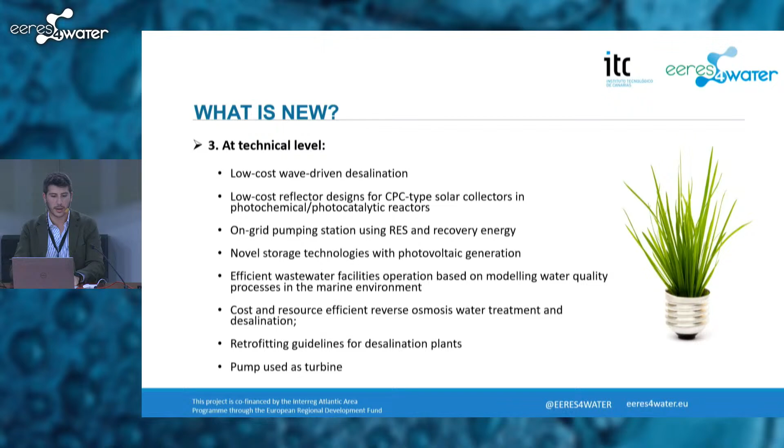Also new at technical level, we have developed several pilots and plans. Some of them are low-cost wave-driven desalination, low-cost reflector design for CPC type solar collectors, on-grid pumping station using RES and recovery energy, novel storage technologies with photovoltaic generation, efficient wastewater facilities operation based on modeling water quality processes in the marine environment, cost and resource efficient reverse osmosis water treatment and desalination, and retrofitting guidelines for desalination plants and pump use as turbine, were some of the technical aspects covered during this project.

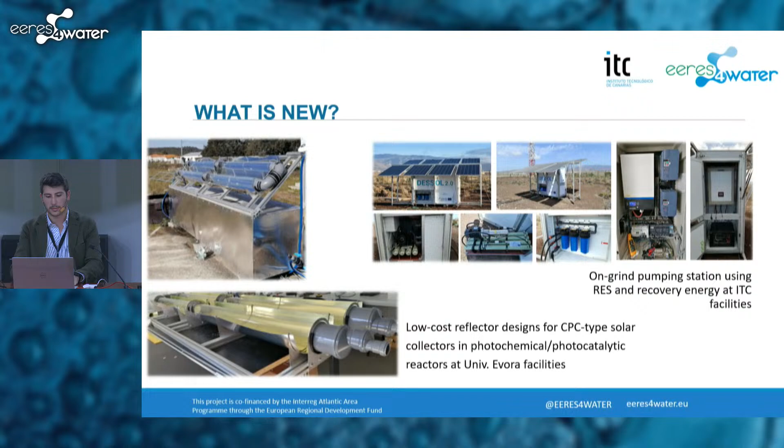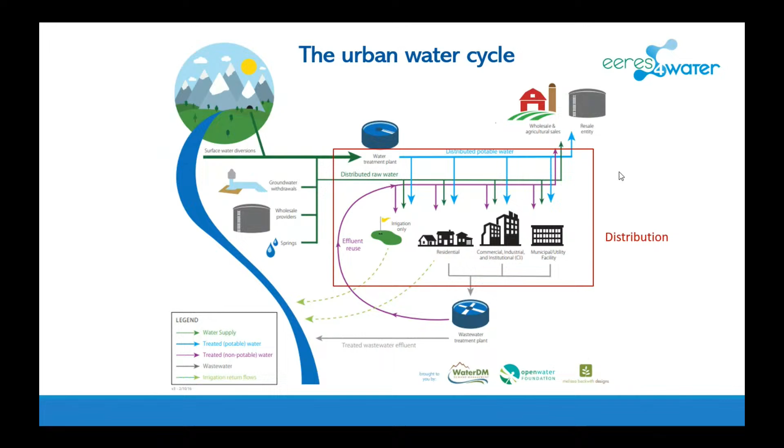So this is a very simple schematic representation of the urban water cycle, and I will cover some of the challenges and policy recommendations that have been found across the different parts of the urban water cycle, along the pumping and production, distribution to end users, and also collection for sanitation, and not least the wastewater treatment and reuse.

So two common features with different intensities in the 4 regions investigated is that, of course, demands are increasing all over, not just urban demands. Demands are increasing for many other uses as well. So this poses a challenge in terms of securing water quantity.

Different regions are placing different solutions, either by adopting desalination technologies or bringing water from long distance, or even groundwater mining. But there is also a growing problem of water quality deterioration caused by point source and diffuse pollution, and this is also increasing the cost of potabilization. Obviously, the pressures and risks emerging from these challenges lead to a deterioration of water bodies with the risk of non-compliance with EU directives. But of course, one can easily imagine that this is also increasing the energy footprint of water provision overall.

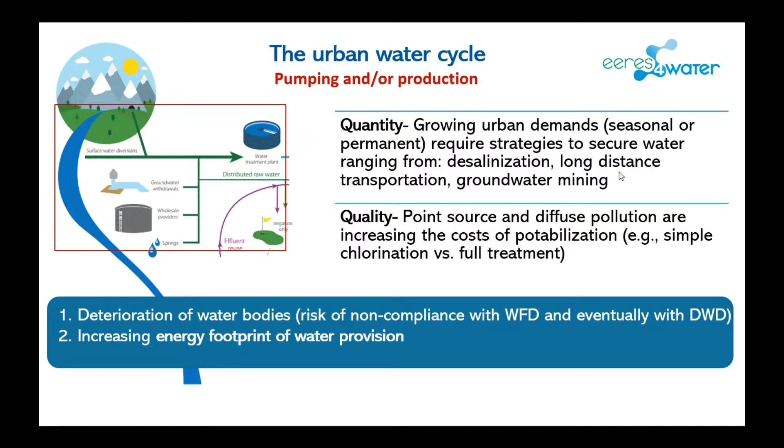When it comes to distribution, the two most recurrent issues we encounter: one is infrastructure aging, and this was a common feature across all the regions. The lifespan of pipes is simply prolonged well beyond their planned capacity, and this is somehow related to poor asset management. Another issue, recurrent in some regions but not necessarily everywhere, is limited capacity for controlling illegal water abstractions.

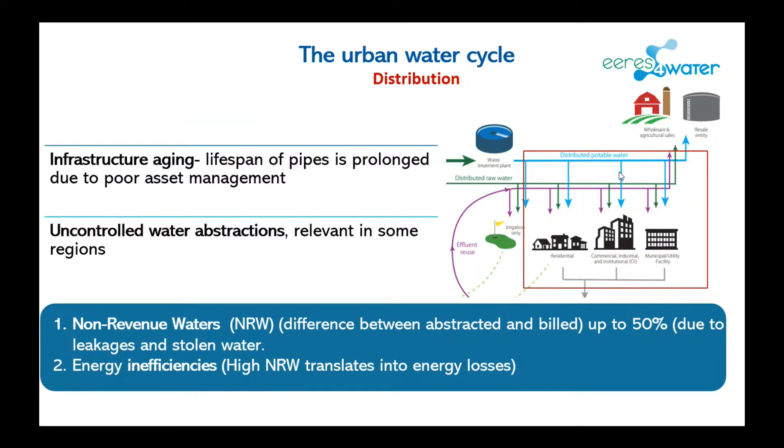This translates into a number of challenges, on one hand the high level of non-revenue water, understood as the difference between the water abstracted from the source and finally delivered to households. It can be up to 50%, in some cases even higher, although there is huge variation. This generates lots of inefficiencies, not just because a lot of water is lost, it's also water that isn't billed. And last but not least, very importantly as well, energy inefficiencies.

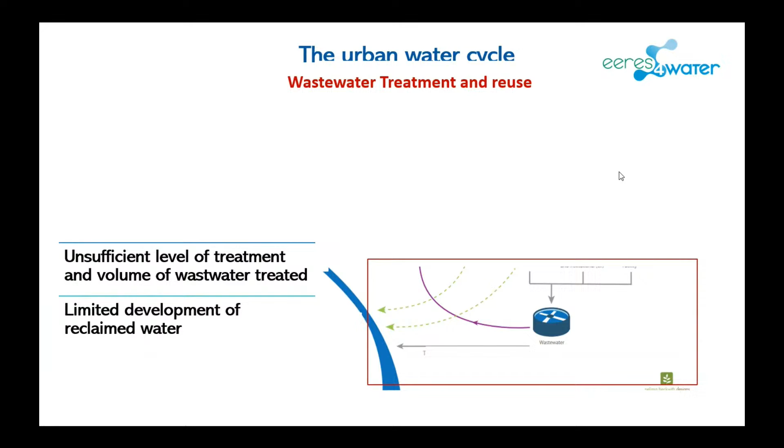When it comes to wastewater treatment, some of the most prominent challenges are first, the difficulties in the requirements and targets of the Urban Wastewater Directive. That means insufficient level of treatment in many areas, and also of the volume that is actually treated. And then also importantly, the limited development so far of reclaimed waters, due to different topics.

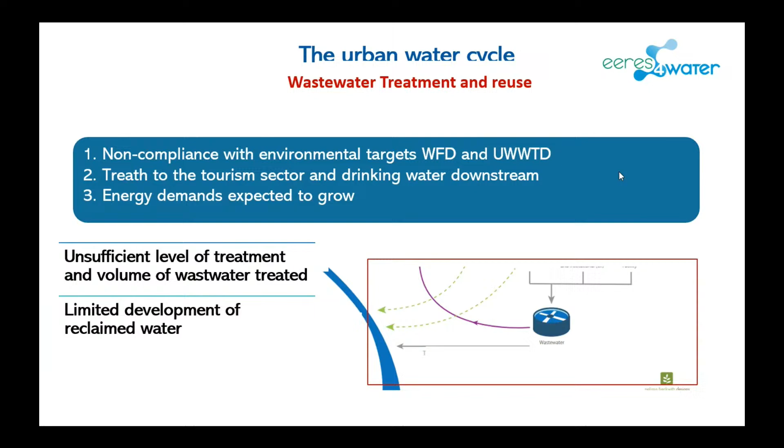This, of course, translates into risk of non-compliance with EU directives, but it also has many socioeconomic implications for the tourism sector due to the deterioration of water quality, and even for drinking water downstream. And importantly, there is a gap in terms of energy demands that will have to be met, so overall energy demands are also expected to grow on this front.

We did a much deeper analysis of what I'm presenting here today, but I want to highlight a number of the most outstanding policy recommendations that were provided. There were many technical recommendations, and this project has a strong focus there, so I won't go into the details. But what was most interesting when speaking with stakeholders is that a lot of the recommendations are actually at the level of the regulatory framework and institutional cooperation.

Fundamental aspects are also related to awareness raising. It seems this is still not clearly understood, and more efforts need to be allocated to raise awareness among citizens about the value of water, and the growing risk of mismanagement and climate change on top of that. Also, making more explicit the linkages between water and energy - when someone opens the tap, they're not necessarily aware of the amount of energy resources behind it.

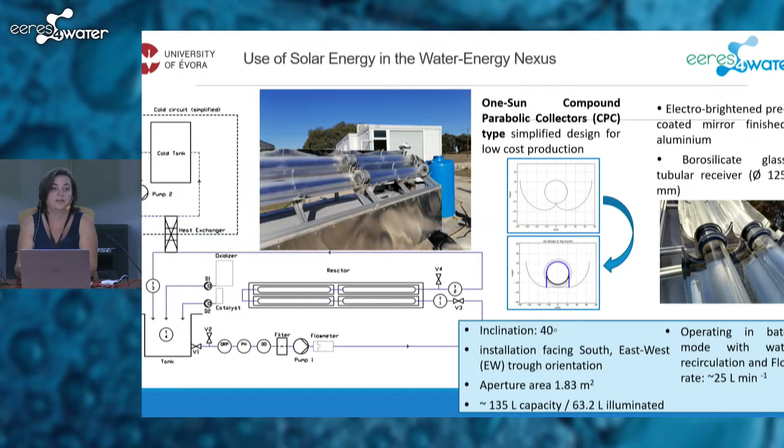This reactor has a compound parabolic collector type that is able to use both direct and diffuse radiation in these photodegradation processes. The design of this collector has been simplified to decrease production cost, which is one of the main innovations of this reactor. Also, the tubular receivers where the fluid circulates have a higher diameter, so we have a higher path length, allowing also the treatment of batches with higher volumes.

This reactor is installed at University of Évora facilities and is able to treat 135 liters each time of effluent, with a total volume of 135 liters, of which 63 are illuminated. Here are some images of the reactor under operation. Furthermore, this system will have a photovoltaic system to provide energy for the auxiliary systems, making it 100% renewable.

Our first experimental tests were carried out with 4 pharmaceutical compounds detected in surface waters in the Alentejo region, and they proved capable of removing up to 79% of naproxen and 88% of diclofenac, without the use of any catalysts.

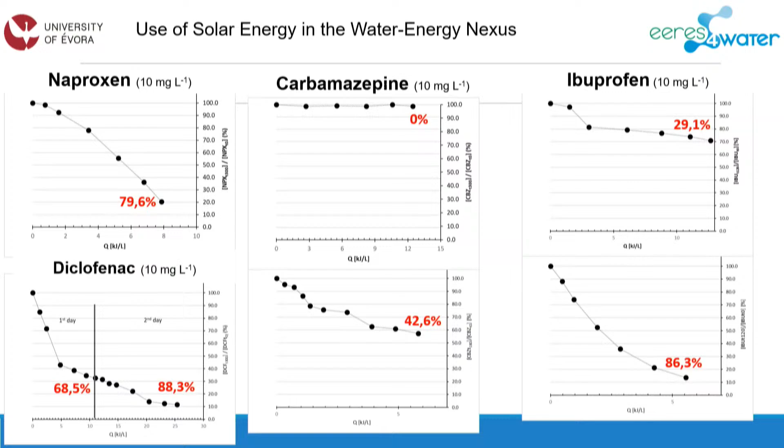For other more recalcitrant compounds such as carbamazepine and ibuprofen, which cannot be degraded only with direct use of radiation, further heterogeneous photocatalysis tests were carried out using titanium dioxide as a catalyst. In this case, carbamazepine was reduced up to 42% and ibuprofen up to 86%. So this can really be a new technology that can be coupled to conventional wastewater treatment processes.

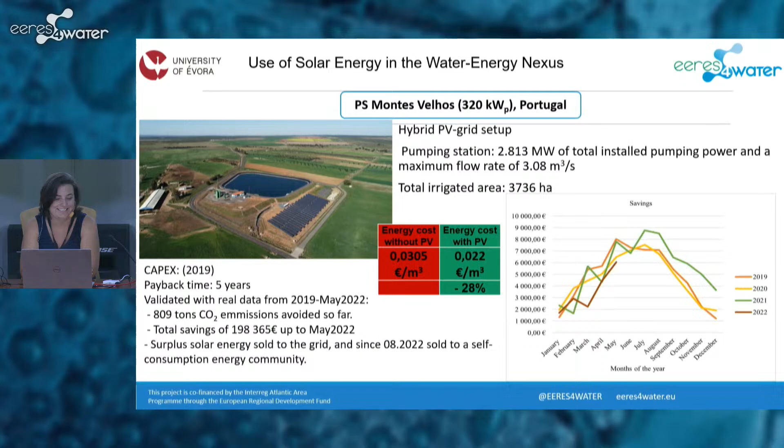Hi, good morning, thank you all for coming. I'm going to present another type of solar energy application to the water energy nexus: in this case, photovoltaic pumping or irrigation.

What are the main issues we should tackle regarding this technology? There are three main topics: first, how to properly design a system like this for high power pumping or high power irrigation; second, after designing it, how to finance it, how should we pay for these systems; and third, how should we operate, control, and properly maintain these systems to match the performance indicators for these kinds of business models. These were the three main issues we tackled.

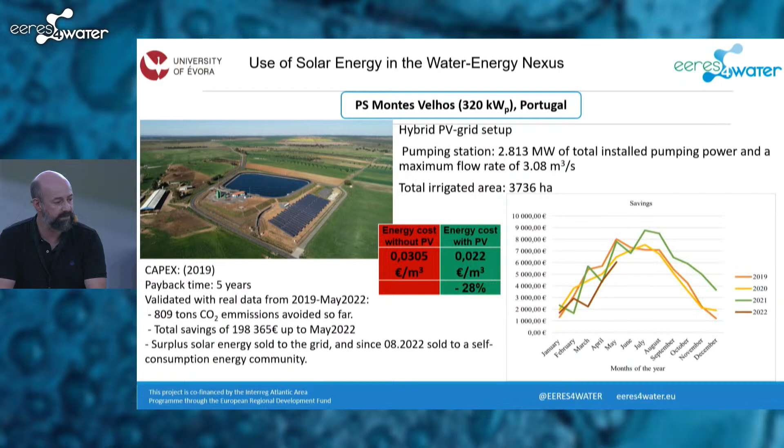Today I bring you two slides with two real case study examples that we have approached and developed, with real data, so what you are seeing here is real data of these systems. They are still operating and are within partners of our unit. For instance, this is a hybrid photovoltaic and public grid setup, so hybridization is possible, and different configurations of power sources can be made. This is a huge pumping station with almost 3 megawatts of pumping power.

So it's providing pressurized water to farmers of 3,700 hectares of irrigated area. The capex of this installation was more or less around 300,000 euros, and the payback was defined for 5 years.

With real data up to May this year, we have calculated almost 800 tons of CO2 emissions avoided, so really important figures. In savings, we already surpassed more than half of the capex investment. The energy costs for pumping at this station have become lower, almost 30%, with this kind of installation.

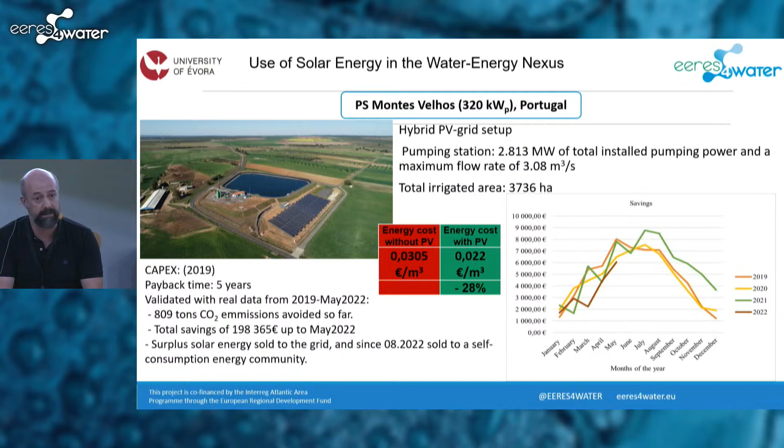So the owners and end users can be really happy with this, and probably they will expand this solution in the near future.

So how should we design it? We have tackled the different issues here. We are really advising users and providing good practices for design. They should be using one-axis sun trackers like this one, that track the sun on a horizontal axis from east to west, providing a flat power generation profile along the day, with high power available for pumping from early morning until very late in the day. These are the configurations that should be used in this kind of pumping solution.

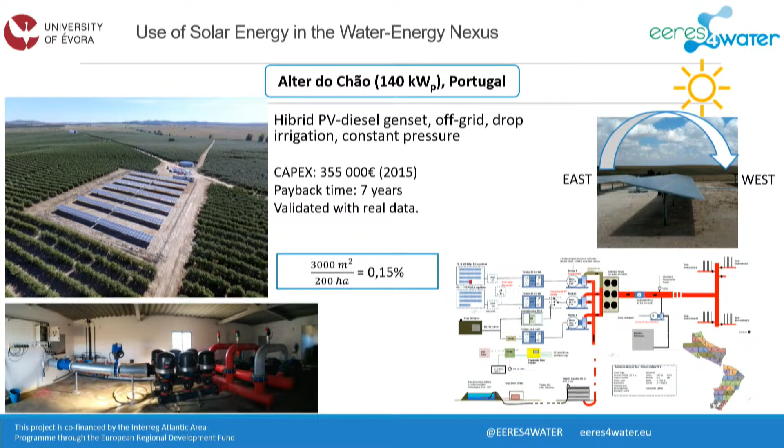And this system design really matches the irrigation needs and seasonality. So when you have the higher irrigation needs, you also have the higher solar resource availability.

So this is a different configuration, a hybrid photovoltaic diesel generator setup, an off-grid application. This is an olive orchard farm where we are irrigating almost 200 hectares of land. This pumping station is very far from the electric main power lines, so it's not feasible to do a grid connection here. The previous energy source was a diesel generator.

As you imagine, it's quite expensive right now to do irrigation with diesel generators. The irrigation sectors were already designed so they have to irrigate during the night due to the design of the hydraulic sectors. So we are really having the best of a hybrid photovoltaic diesel genset system.

The payback time with the capex from 2015 is more or less 7 years, probably much lower now with the current downward trend of PV prices.

And just to destroy the myth that we occupy valuable land, you can see we occupied 3,000 square meters, which is much less than 1% of the land of these olive orchards. So this is really a myth. We can irrigate a huge land while occupying a very small area.

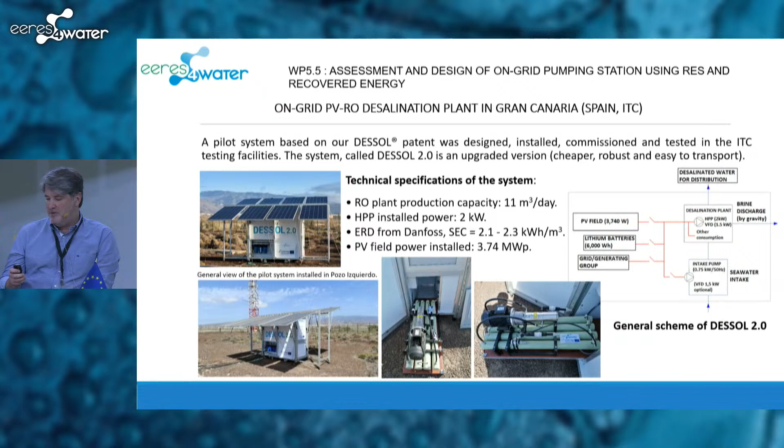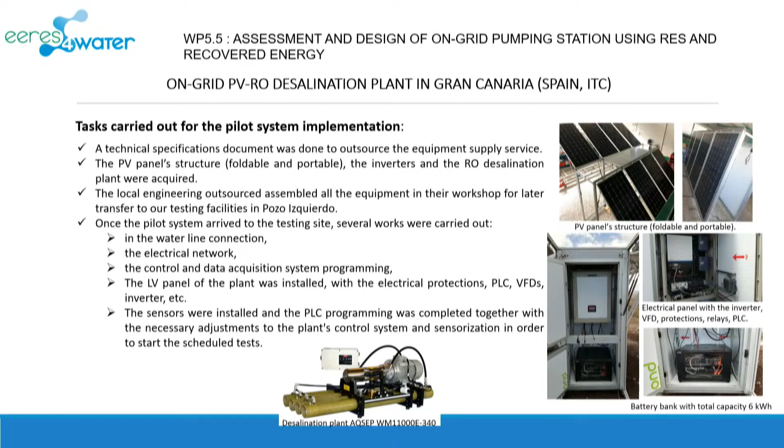The tasks carried out for the implementation of this system: first we made a technical specification document in order to outsource the equipment supply service to local engineering. Then the PV panel structure, as you see in the image, foldable and portable, the inverters, and the reverse osmosis desalination plant were acquired. The local engineering outsource assembled all the equipment in the workshop for later transfer here to Pozo Izquierdo.

Once we had the pilot here in our testing facilities, we started carrying out several actions. The first was the water line connection, the electrical network, and the control and data acquisition system programming. The low voltage panel of the plant was also installed with electrical protections, PLC, VFDs, inverter, and so on. An important thing I'd like to highlight is the sensors — we have totally sensorized the desalination plant.

Some scheduled tests were carried out, mainly focused on three ways of driving the plant. The first one was solar PV plus electrical grid. The second group of tests was solar PV plus batteries. And the third one was solar PV plus batteries plus grid.

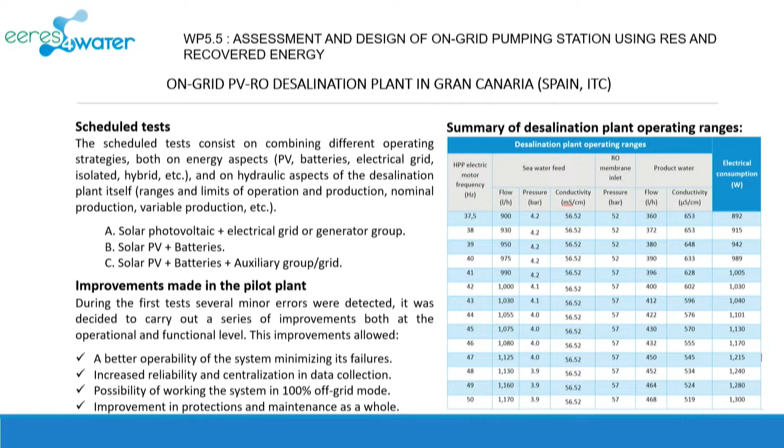During the first test, several minor errors were detected, and we decided to carry out some improvements in the pilot plant, both at the operational and functional level. These improvements allowed us better operability of the system, minimizing its failures, increasing reliability and centralization of data collection, the possibility of working the system 100% off-grid, and improvement in protection and maintenance as a whole.

Here in the table you can see a summary of the desalination plant operating ranges.

Among other improvements, the inverter charger was replaced by a Victron pack system that allowed us better control over the operation of the reverse osmosis plant, and the centralization of data records from both the PV system and the desalination plant. This is important because this improvement wasn't initially contemplated in the project.

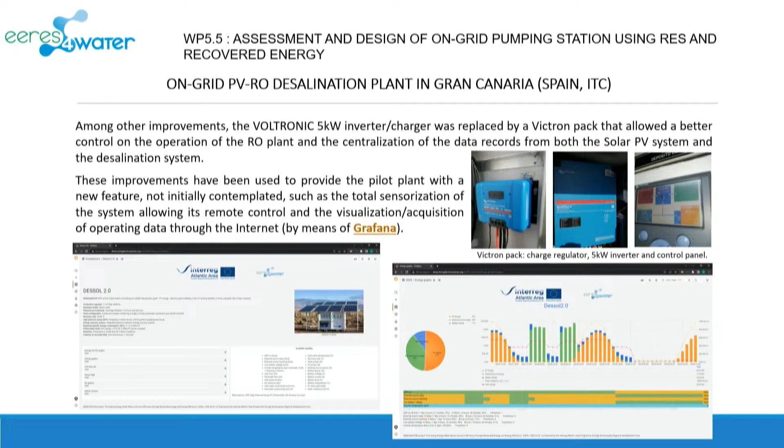Now my colleague Carmelo, who has worked very hard on this system, will show you a presentation of the Grafana system.

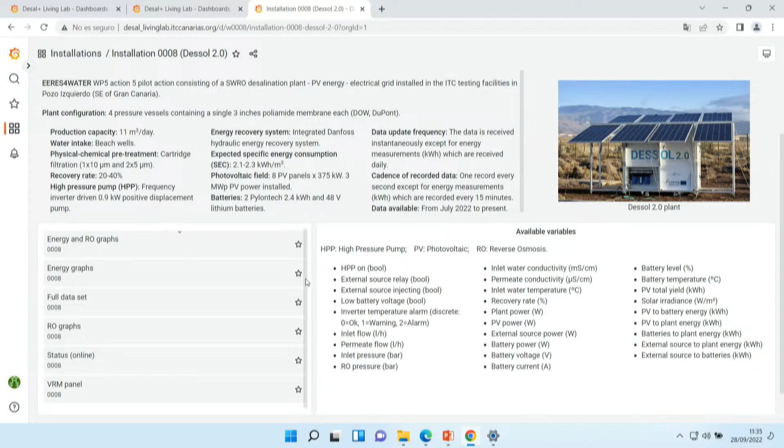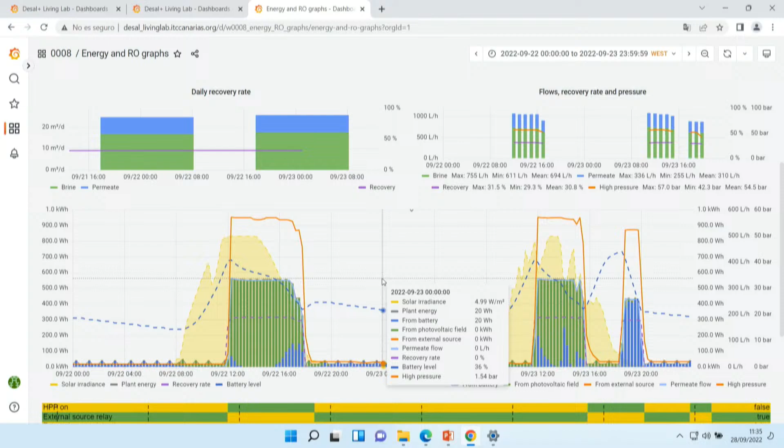Good morning everyone. Here you can see the platform where we implemented the visualization of the plant's parameters. Here we have an example combining the solar field, photovoltaic energy production, and the plant operation. In the top right corner, we can change the period.

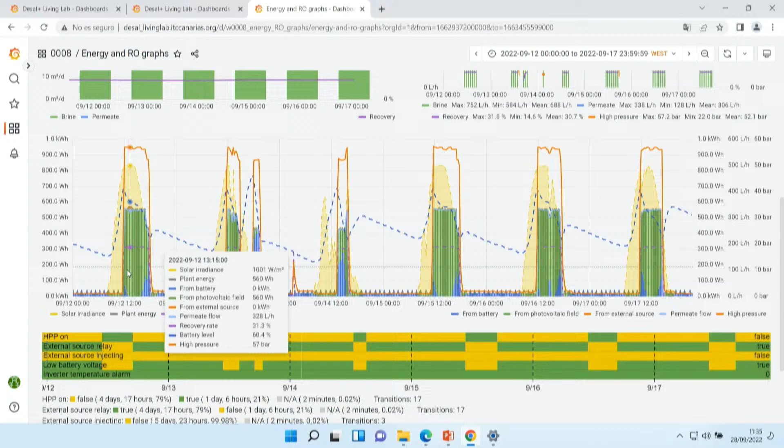We can see a wider range, and it will change in every single panel in the dashboard. We can check how the water production or the solar energy production was, and where it was destined - to the battery from an external source or directly to the plant.

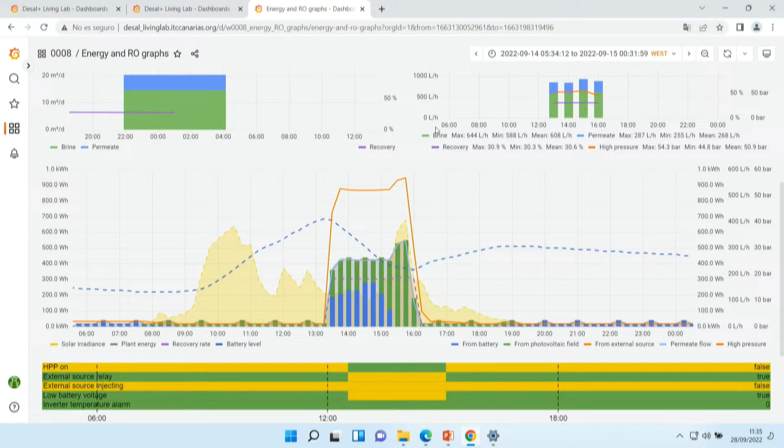So here we can also see the plant live, its current status, but unfortunately it's not working right now, so we can't show you. That's all from the platform.

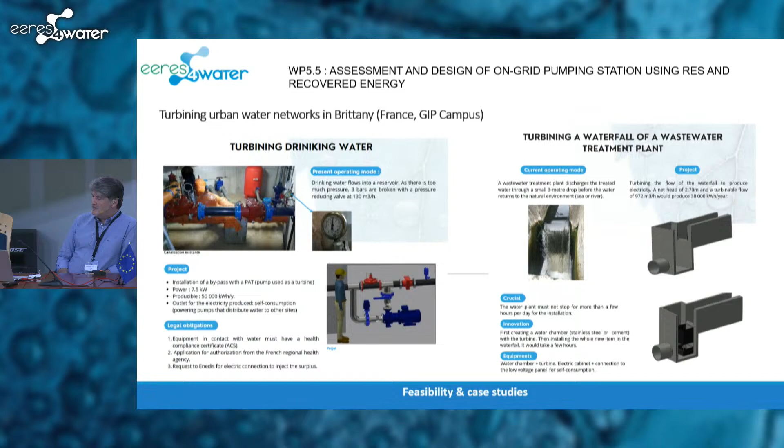You're on mute, Eric. Okay, do you hear me? Yeah. Okay, thanks. I've got some echo, it's okay. Can you please show me the PPT? Thanks, so the screen is a bit fuzzy. Maybe I'd better read my own screen, but you can stay on the PPT.

GIP worked on the turbining of water networks in Brittany. As you can see, we did a feasibility study about turbining drinking water. We get water coming from the pipe into a reservoir. There is too much pressure, so a pressure reducing valve is breaking this pressure, 3 bars at a flow rate of 130 cubic meters per hour. So the energy is just dissipated into noise and heat.

The aim is to install a bypass with a micro turbine. In fact, it's not a real micro turbine, it's a pump used as a turbine in reverse mode. With this kind of installation, we can recover around 50,000 kilowatt hours a year.

The good thing with this pump is that when you install equipment in contact with drinking water, you always need a health compliance certificate, and the pump already has it, unlike the turbine.

The second case study is turbining a waterfall at a wastewater treatment plant. The project deals with a head of less than 3 meters, and a flow rate a little less than 1,000 cubic meters per hour. Turbining this fall, we had a necessity to avoid stopping the wastewater treatment plant for many hours. So the challenge was to create a water chamber with the turbine already implemented, and then install all these items in the fall of the wastewater treatment plant - and that's quite possible.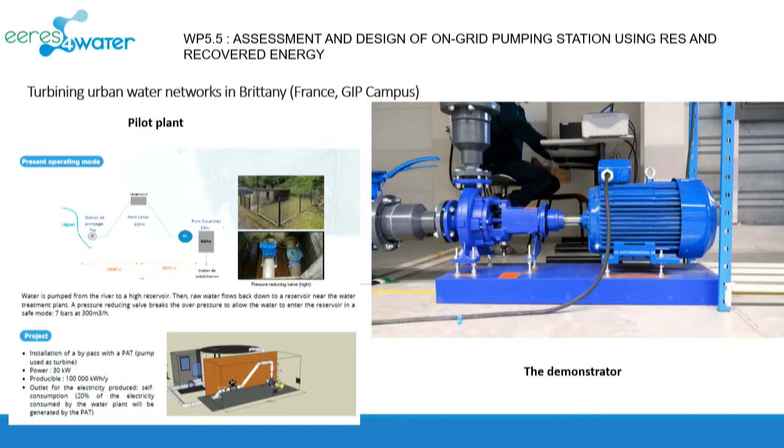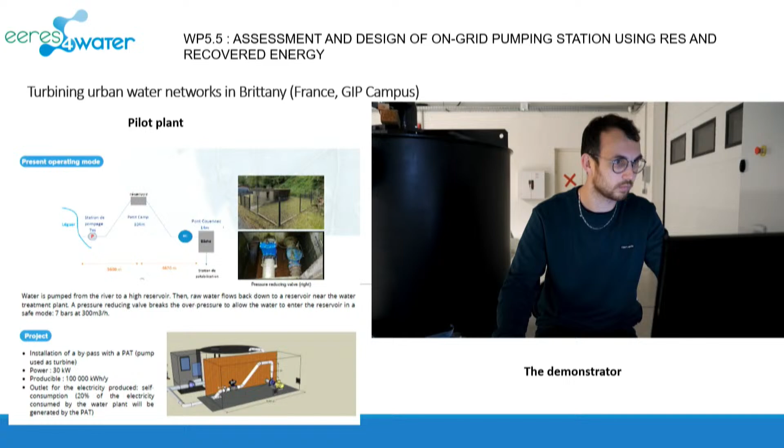Maël, the doctoral student working on the project as well. Thanks. Next slide, please.

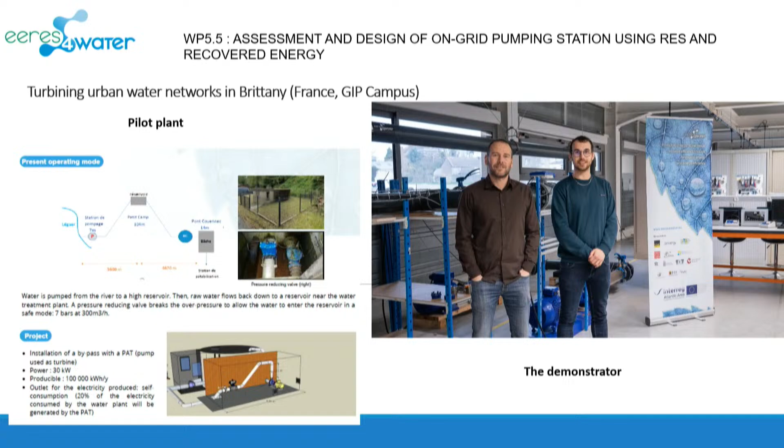Okay, let's look at some opportunities for microturbining drinking water. Actually, there is some energy available, but it's unexploited yet. Pumps used as turbines are between 2 to 5 times cheaper than a turbine. We already got the ACS, the attestation of sanitary conformity, which is required when you're in urban water.

It's easy maintenance - it's a pump turbine, it's like a pump, same maintenance. Most of the time, no civil engineering is required, just a bypass with a pump. The whole system remains in place and still works. The priority is always the water service.

All those results will be in the document that we are making with ITC in order to show you all our work. And we aim to disseminate all this technology, and we hope that each stakeholder or water company can implement this kind of system as well. Thank you very much for your attention.

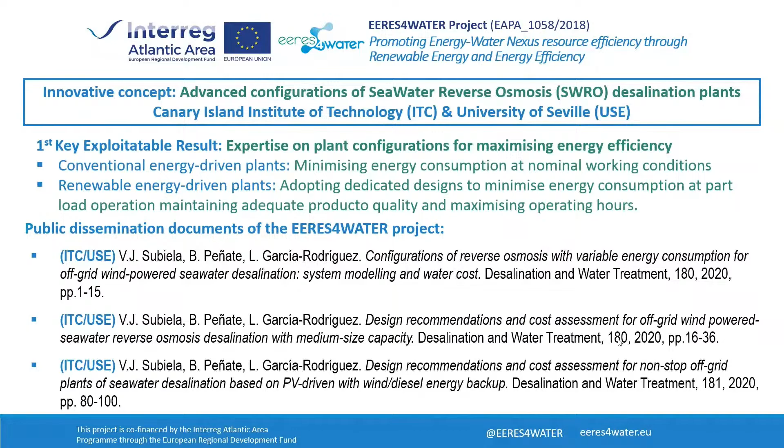Second key result corresponds to design recommendations of desalination plants coupled to conventional technologies of concentrated solar power plants. We have been working with Plataforma Solar de Almería CIEMAT and the University of La Laguna.

All of us, and also University of Évora, are working on integrating desalination into the next generation of CSP plants, specifically plants based on either conventional gas turbines, supercritical CO2 cycles, and supercritical water cycles.

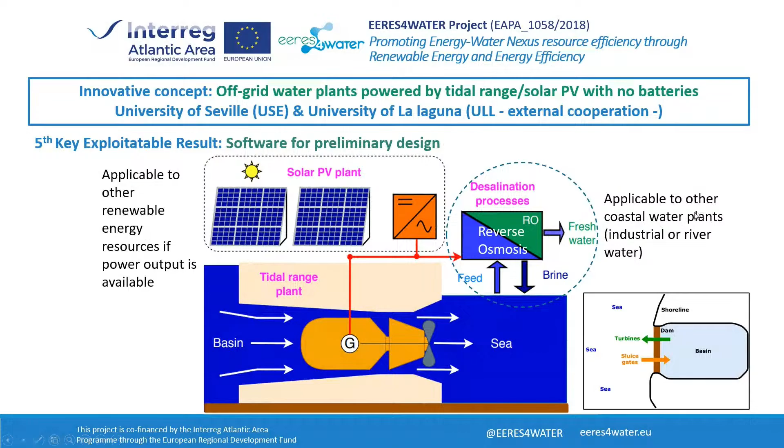On the left, the hybrid power plant drives the reverse osmosis plant in a seawater desalination application. We developed dedicated software for preliminary design, and have 3 related publications so far. Needed inputs are the solar and tidal range resource of the plant location. You can see the case of Cardiff concerning public data on tidal resources.

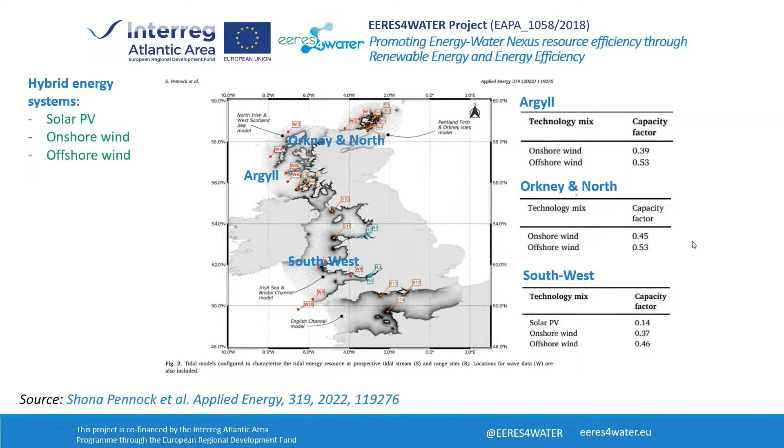As future work, other renewable energies should be studied. We found a comparative assessment by means of the capacity factor of the power plant corresponding to solar and wind energies. So offshore wind system seems to be the most suitable selection for hybrid tidal plants. This will be our following target, out of the scope of this project.

Design targets will be, first, optimization of the consumption curve due to the use of advanced water plants based on gradual capacity designs, which is our first key exploitable result. Second, optimization of the production curve. We are studying 3 options which are described in the following slides.

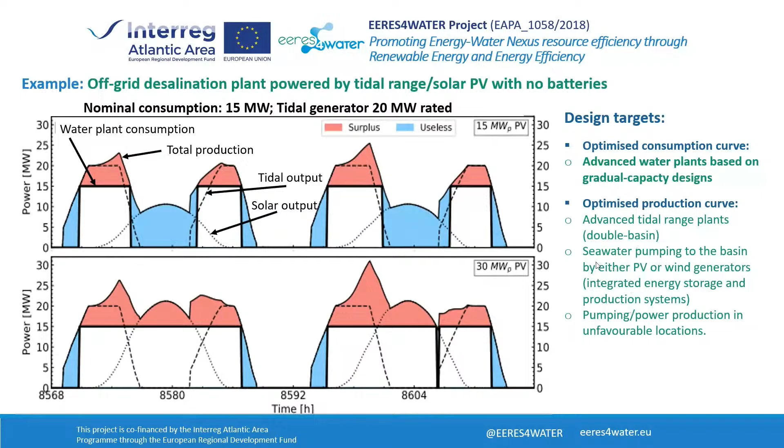We can optimize the tidal range power production by means of adopting double basin tidal plants. Turbines work between basin 1 and 2 instead of between the basin and the sea.

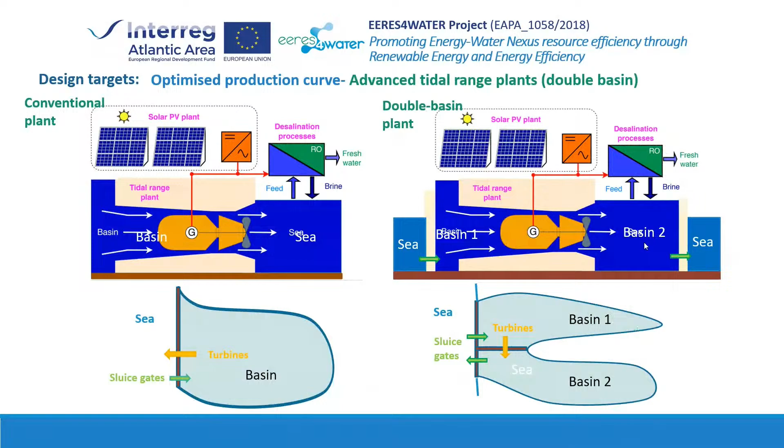A second option corresponds to integrating energy storage in the hybrid plant by means of water pumping from the sea to the upper basin. You can see the concept in those figures.

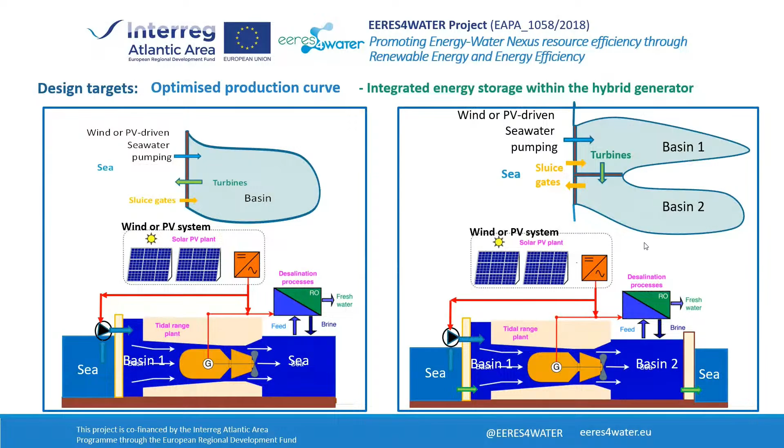Finally, given that many regions in the Atlantic area exhibit limited tidal range resources, we are studying the concept of combined pumping and power production in order to integrate large capacity energy storage and also manageable power production.

And that's all. Thank you so much for your attention.

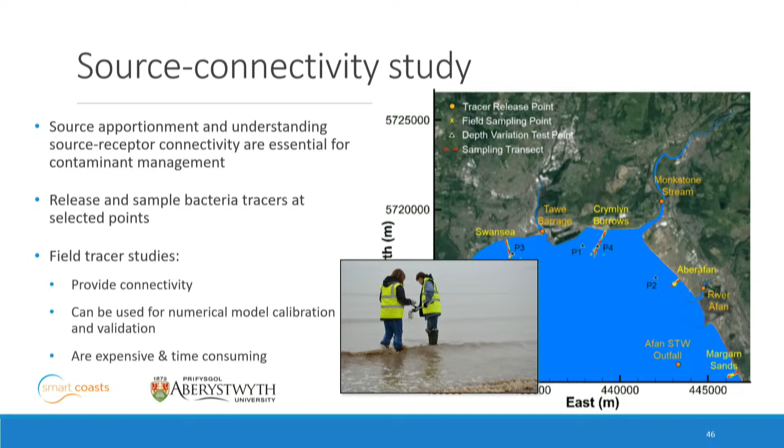The other approach is numerical modeling. Numerical models are fast and fairly cheap compared to field studies, but you need data to validate these numerical models. So in this project, we took a case study located in Swansea Bay, in South Wales, Southwest England, Southwest United Kingdom.

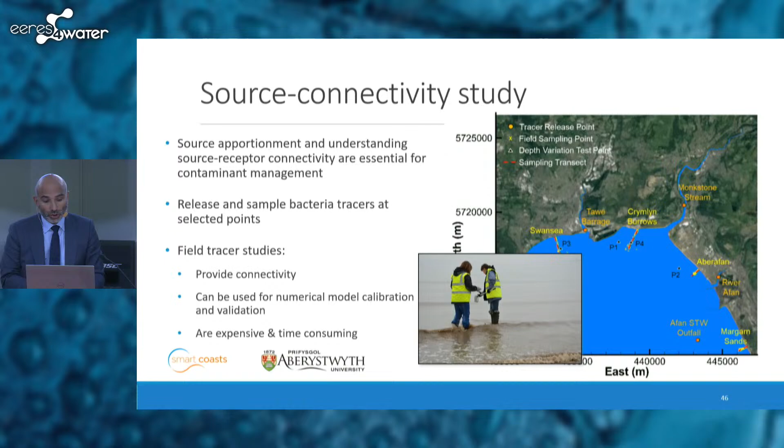We took this case study and tried to enhance our model to make sure it included all the physical activities. We chose this site because there are different sources of bacteria, including wastewater treatment works, rivers, and streams discharging to this area. Also, a large amount of data was collected in a previous project called Smart Coasts, through our colleagues at Aberystwyth University.

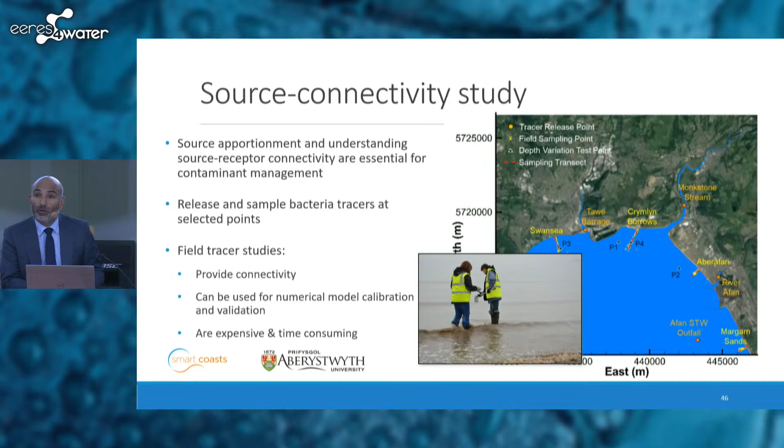We used this site, and the estuary is very well mixed—it has the second highest tidal range as part of the Bristol Channel Severn Estuary. You generally use a two-dimensional model for a case like this, so we set up our Telemac two-dimensional model, which is very widely used, and started predicting.

We looked at the processes and found out we actually needed a three-dimensional model. But a three-dimensional model doesn't work just because it's three-dimensional. One key element was buoyancy and the effect of salinity, because fresh water coming from the rivers was lighter, so it was floating on top of saline water, and that fresh water was carrying contaminants—it was key to our modeling.

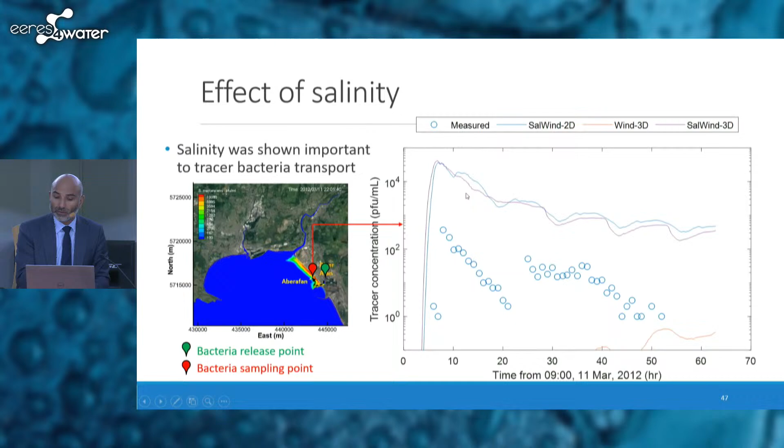When we started modeling in 3D with the impact of salinity and wind, we got much closer results, shown at the top, but they weren't ideal yet. We had seen before that you need to use different decay rates because bacteria die at different rates, so we started using a two-stage decay rate and got a better result.

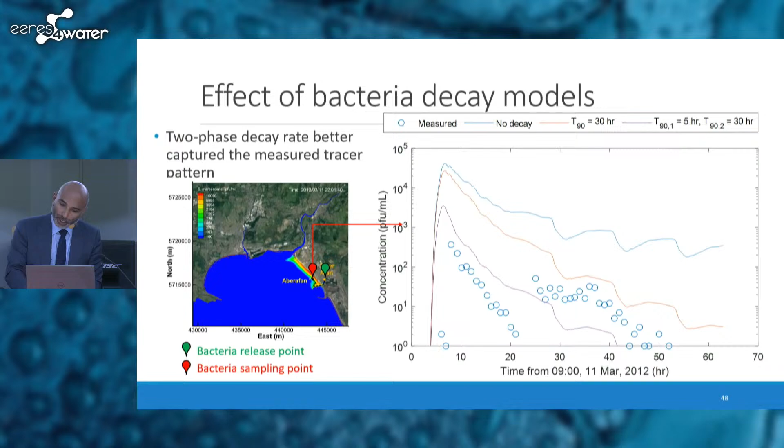I have very little time, so I won't go into details of those, but if you're interested, come talk to me later. I also mentioned diffuse sources.

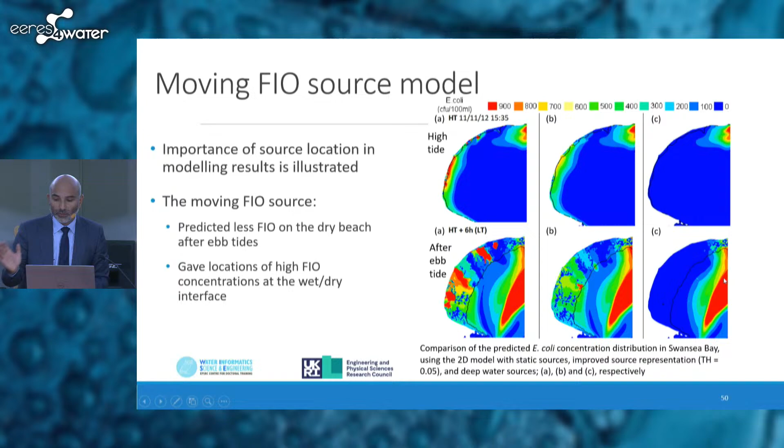We started doing that. The first approach used points close to the land to represent the streams, and the second used deep points to represent the streams. None of these represented the physics properly. So instead, we tracked the wet/dry front and added discharges at the points where water actually meets the streams, and we got results much closer to reality.

Now I pass to Arthur to talk about our real-time modeling, which was based on AI.

Early warning systems are important since they issue warnings about future poor water quality. There are several examples in Cardiff Bay, the EU Swim project, and also in Hong Kong. They have warning systems you can check on your iPhone showing how poor or good the future water quality is. This system can allow wastewater treatment operations to meet water quality standards with minimal possible energy, because you know the future expected water quality. Also, it can warn the public of poor water quality in the future so they don't go to the beach.

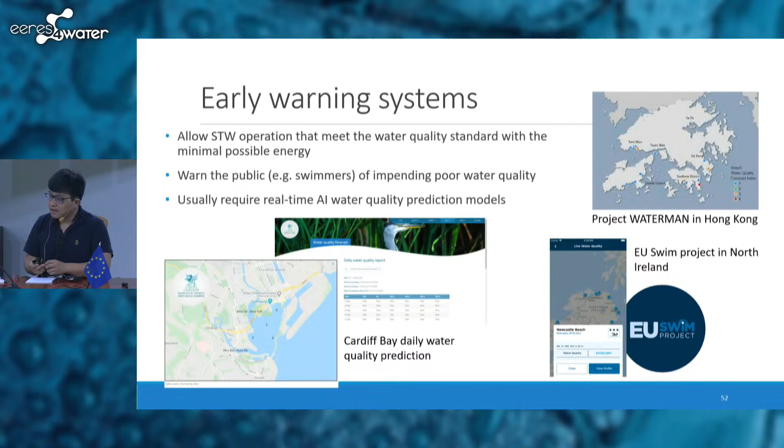However, this real-time warning system needs very quick prediction methods. Hydrodynamic models are very good at understanding the system, but may not be quick enough to produce real-time predictions. So we have to rely on AI or data-driven kinds of models. One integral part of this AI model is knowing the key explanatory variables to put into your model before you train it.

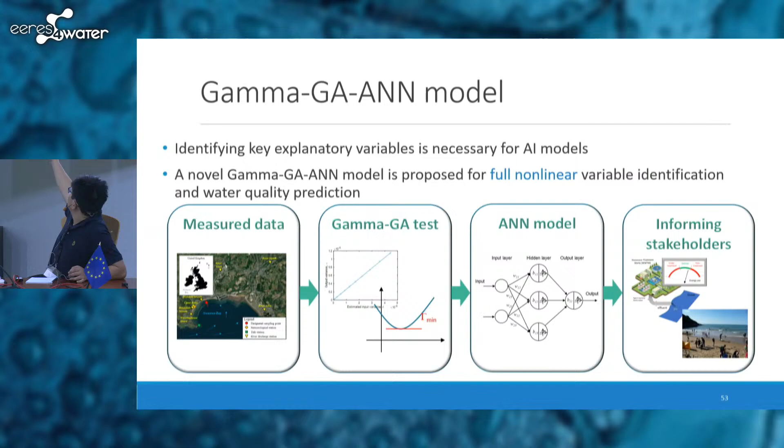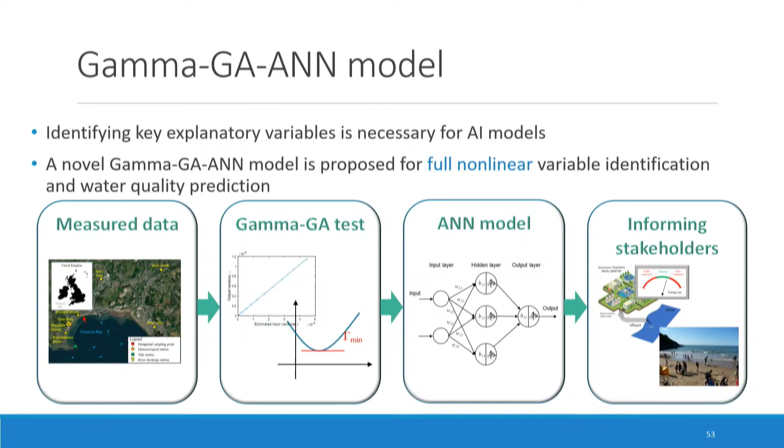Usually this is done, at least in the water quality community, with a linear regression kind of model. So here I propose a gamma GA-ANN model, which can do fully nonlinear identification of variables and water quality prediction. Here are the steps: first, you measure the data; second, you put the data into a gamma GA test, which I will explain; the third is the ANN model, which is quite common; and then we pass the information to stakeholders, such as wastewater management and beach management authorities.

Here is the gamma test. This is a mathematical method where you put in the input data, and it gives an estimate of the noise for an arbitrary continuous nonlinear model. Interestingly, this gamma test does not tell you what the model is, but it can estimate the noise. Let's say we have a lot of variables, we arbitrarily pick a set, plug it into this model, and play around with it. The one that gives you the smallest noise is the variable that you should choose.

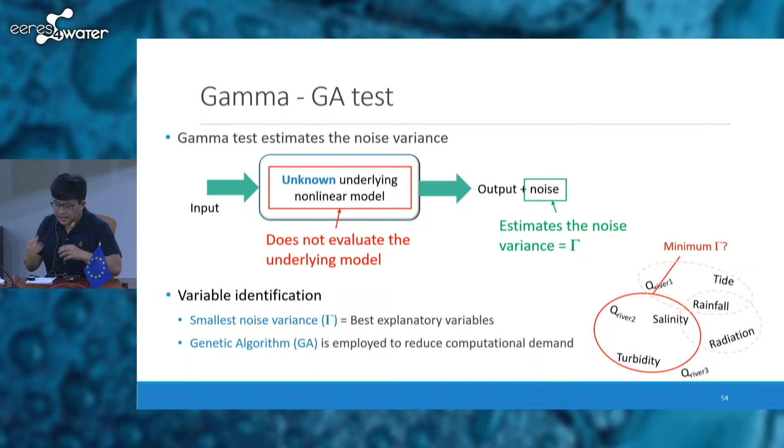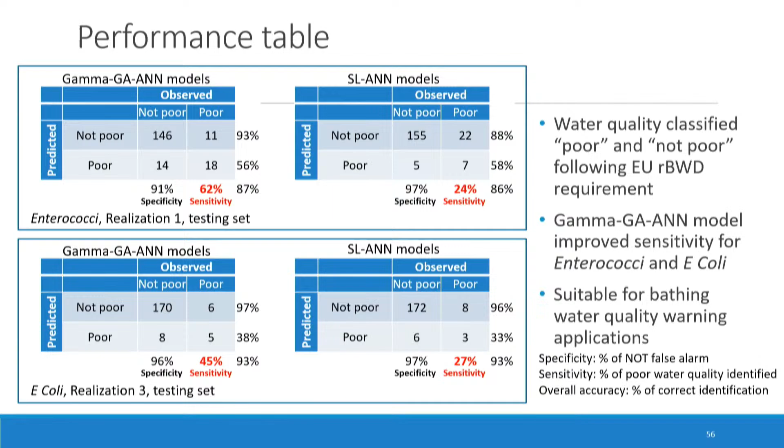Here I compare the gamma GA identified variables, on your left, and the linear identified variables, on your right, in terms of predictive capacity and sensitivity. You can see that the nonlinear model better captures high pollutant events, showing higher sensitivity at the left-hand side compared to the right-hand side. So this new model is better for a warning system because it gives more sensitivity to risky or poor water quality events.

So here comes the conclusion. We have introduced AI and hydroenvironmental models that are important for strategic wastewater treatment and also for warning swimmers. We have developed two types of models which give more information about how to optimize wastewater treatment, but such potential has to be further looked into. Okay, thanks. Thank you.

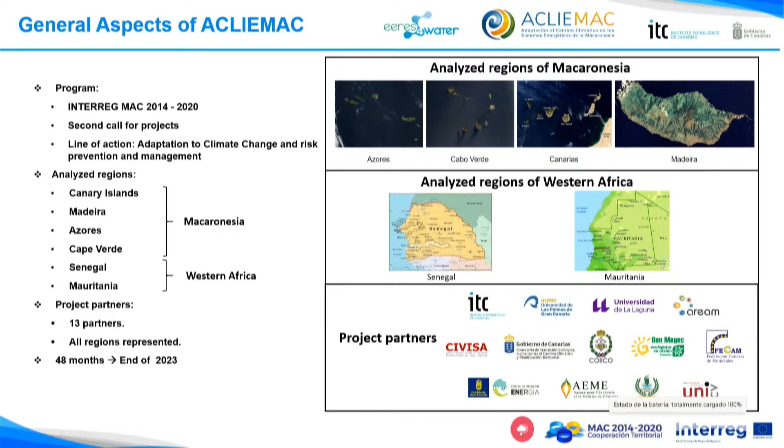So, in the project there are 13 partners. ITC is coordinating the project, and we have, as you could see, all the regions participating in this call: Azores, Madeira, Canary Islands, Cape Verde, and also Senegal and Mauritania, West Africa regions, in which we are implementing solutions. We also do paperwork regarding the planning. We started in 2020, and we finish this project next year in 2023, so we are in the last section of the work.

As an example of the results we have obtained, we are going to present the ones we have for the Canary Islands. Anyway, we have results also for Madeira, Azores and Cape Verde until now, so if you have any interest, we can speak about that.

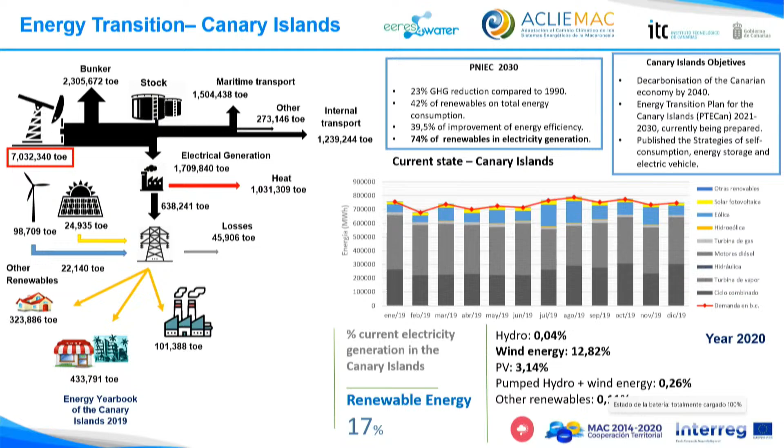For the Canary Islands, first of all, regarding the analysis of the current situation, we have a strong dependency on the use of fuels. We require around 7 million tons of oil equivalent per year to keep our energy system running, and that means around 1.7 is required for the electrical system and around 2.7 for mobility. So we need to decarbonize, and all the governments know that. The objective for the Canary Islands is to reach total decarbonization before 2040. Nowadays we are around 17%. The objective for 2030 is to reach 65% of load demand coverage with renewable energies, so we need to improve on that. It's something really, really important.

I think the situation in all the islands is more or less the same. It's a little more difficult to decarbonize the electrical energy system in islands than in the mainland, because the grid is a bit more problematic. That's the reason why, for example, Spain has a different level of decarbonization than the Canary Islands. So in this project, the first step is the execution of climate models. We have used the IPCC as a reference - they define the main conditions we have to use for this kind of modelization.

As input data, we are using the Community Earth System Model, which is like a compendium of results from different centers around the world regarding climate change. They estimate the meteorological evolution of different parameters from 2020 to 2100 for the 4 scenarios that you possibly know. Here you have the 4 scenarios that we could have.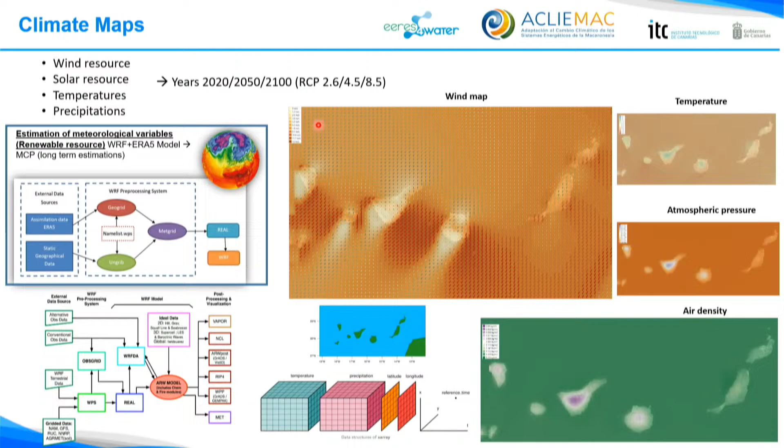Here you have examples, for 2020, because it's like the reference, but also for 2030, 2040, 2050, and 2100, for the regions in which we are working nowadays, and with the three main scenarios, the RCPs that you could see here, because it's like the possible situation that you could have when you analyze the consequences in the future.

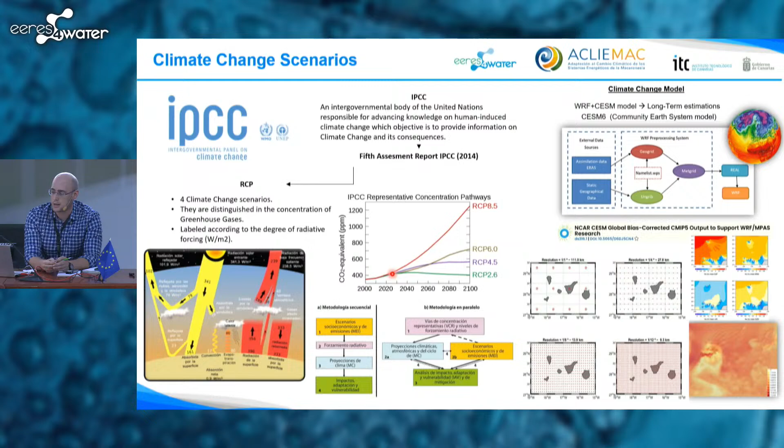So the next step is, okay, I know what is going to happen in the future. Now the thing we have to do is detect or recognize the risk that we will have in the future. That is a methodology we have used also for another project called Circle Impact, which was related to climate change, and well, as you could see, we detected the hazards.

So you define the risk and the impact that you will have. So for example, if the temperature increases, as I mentioned before, you need to know that you need more water, you need to desalinate more water, or even use more air conditioning. So you need to increase the power in the electrical system.

We have other things like, for example, the frequency of the extreme events. We could see that in the last days, with the rain. So we have to define how we can act for these problems. That is like a more general analysis.

Maybe the most interesting or most important is the next one. We have different models. We use as a reference, for example, for the load demand model, a machine learning technique called random forest. Also, we have another alternative that is support vector regression.

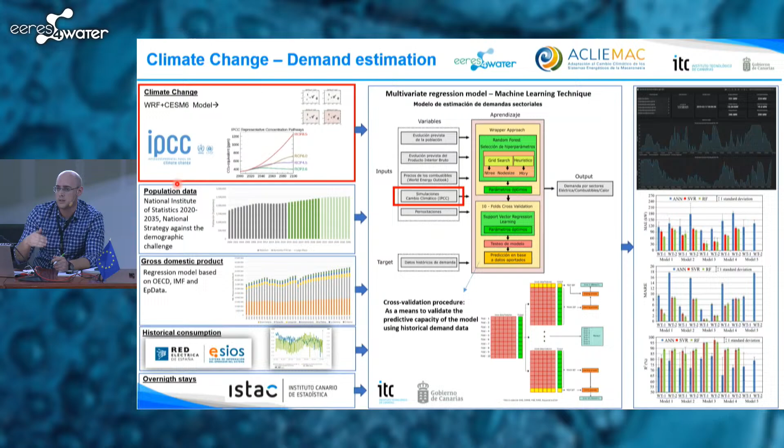So in this case, we introduce signals like the humidity, the temperature, the precipitation, as a way to detect patterns with the historical load demand. So you correlate that information with the variable you want to predict, for example the load demand or the fuel consumption. According to that, you estimate the same values for the future, for all the years that I mentioned before.

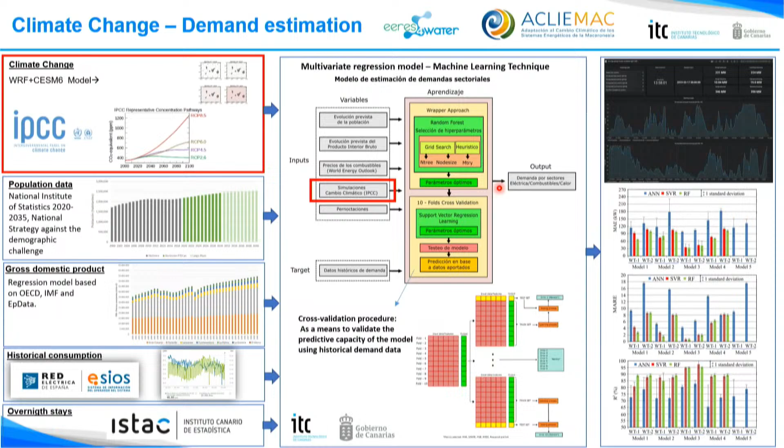So we have executed these models, we have obtained the results, and after that we have another set of models that try to simulate the energy systems in all the regions. For example, in the case of the Canary Islands, we have used a model. This model has been used too for the energy planning of the Canary Islands.

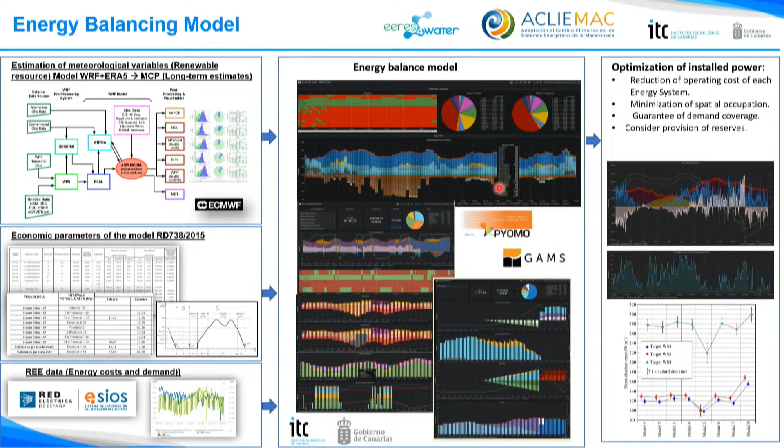So the government of the Canary Islands is a partner in this project, so they have used that information too as a way to improve the energy planning. So it's something important that should be mentioned. We execute this model, and of course you will have information on the power you need to install per technology.

After that, you have to analyze if you have some land restrictions, because it's important in this case. When you are speaking about islands, you have restrictions that you should take into account. For example, the air safety areas. If you want to install wind power here in Canary Islands, you cannot install near the airport, or at least you have to take into account the restrictions that they give us.

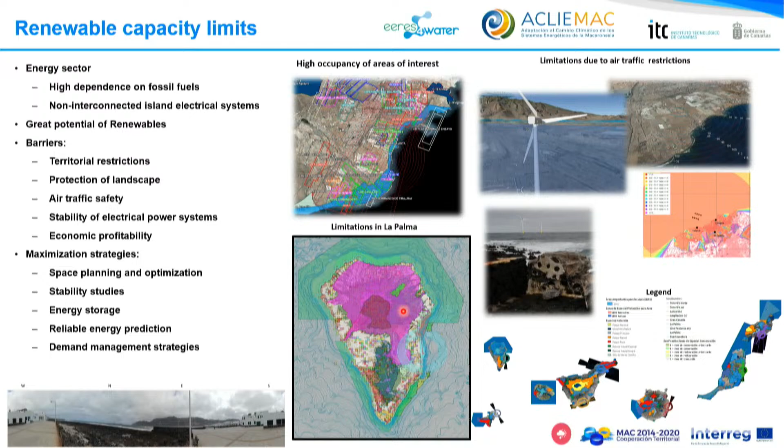So when you analyze that, you introduce the natural protected areas, and you could see that the area available for this kind of facilities is a little bit low in comparison with what you need. So in some moments, it's possible that you need to change and not use wind power, and use photovoltaic power instead, or even the blue economy, as I mentioned before, the offshore wind power and things like that.

At the end, that is the procedure that we have implemented. As I mentioned, we use official data, we execute the weather research forecast, estimate the impact chain, and after that we define the demand for the different sectors before implementing the mitigation plans. These mitigation plans have been developed using this scheme, trying to focus on the things that are maybe better for these regions.

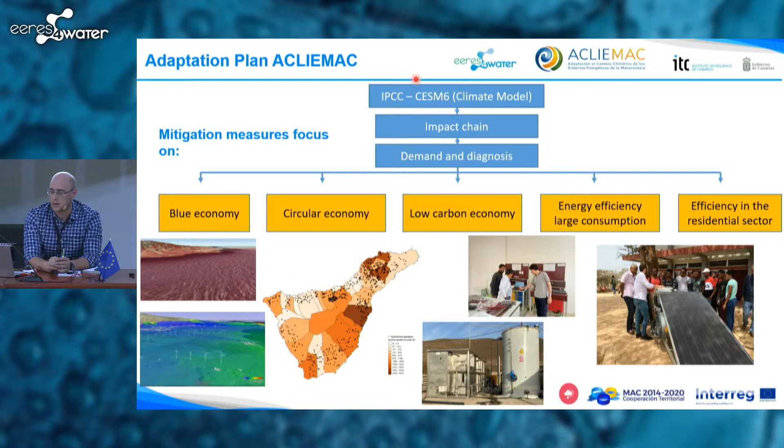And of course, when we speak about the energy system, we need to take into account the integration. For example, the grid stability analysis is something that should be done to check that everything is okay. So we are executing a team specialized on that in our department for the definition of the conditions, mainly in 3 islands: Gran Canaria, Tenerife, and La Palma.

So that is one of the solutions, but also we have others that are important, like for example, the demand side management and the energy storage, of course.

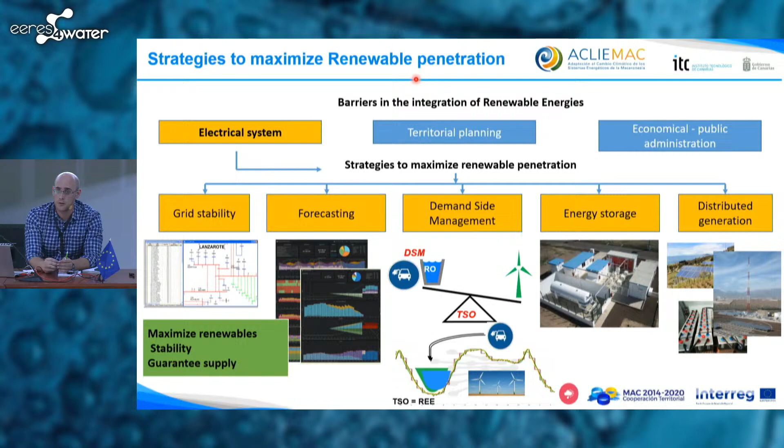So at the end, as I said before, we have some products that could be paperworks, like the mitigation plans, but also we have other lines in this project that is the implementation in real life. So for example, here in our facilities have been installed a solar thermal system for the industries, with part of the financing due to the ACLIEMAC project.

Also, the biogas plant that is being implemented in Senegal, the idea is to commission at the beginning of next year. Also, a laboratory in Cape Verde for biogas too. A battery system has been integrated in the microgrid of ITC as a way to test new energy management solutions according with the climate change. We need to test, and for that, these facilities are really important.

So at the end, you have some products that are for the analysis of how we can act in the future, and others that are more related to these kind of studies. And of course, the dissemination is quite important too. That is the reason why we have also executed, and we will execute too, some training seminars, not only in all these regions in the Macaronesia, but also in Senegal and Mauritania. Well, that is more or less the general line in which we are working. Thank you very much for listening.